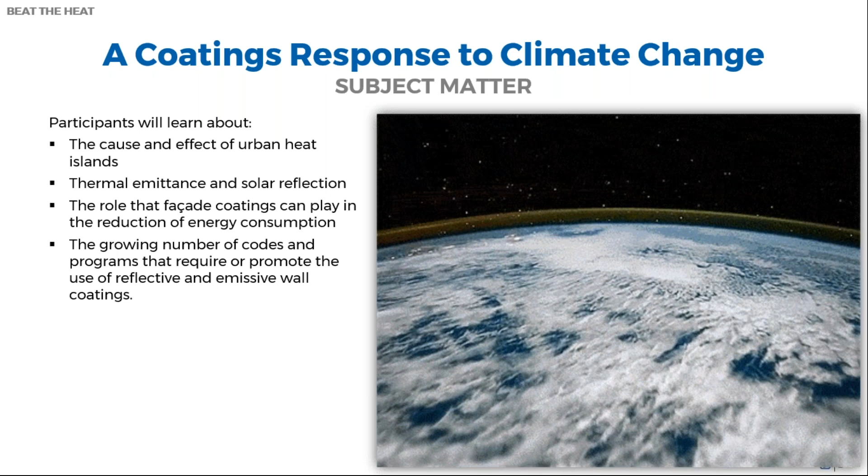You'll already have an awareness of the various cool roof code standards, some of the programs out there, but I'm going to introduce you today also to a relatively new initiative for cool walls. I apologize ahead of time if I get too heavily involved in the physics side of this discussion, but I don't want you to leave here today thinking that I've got some magic beans that I want you to buy from me. So I am going to spend a little bit of time on the physics.

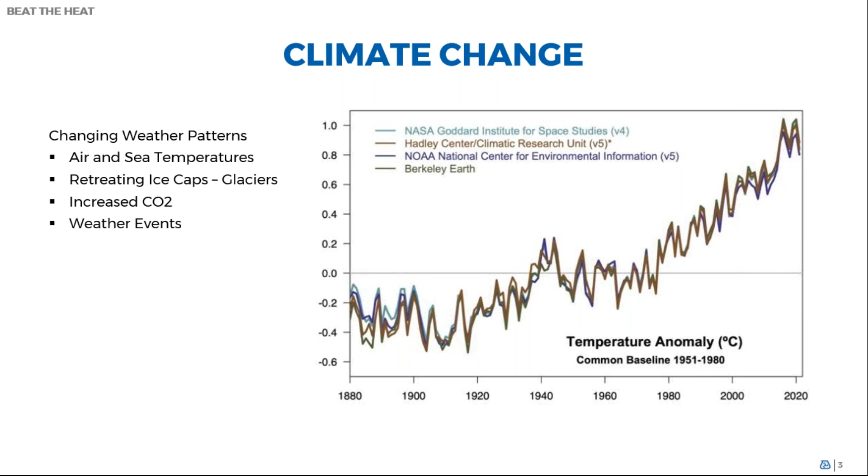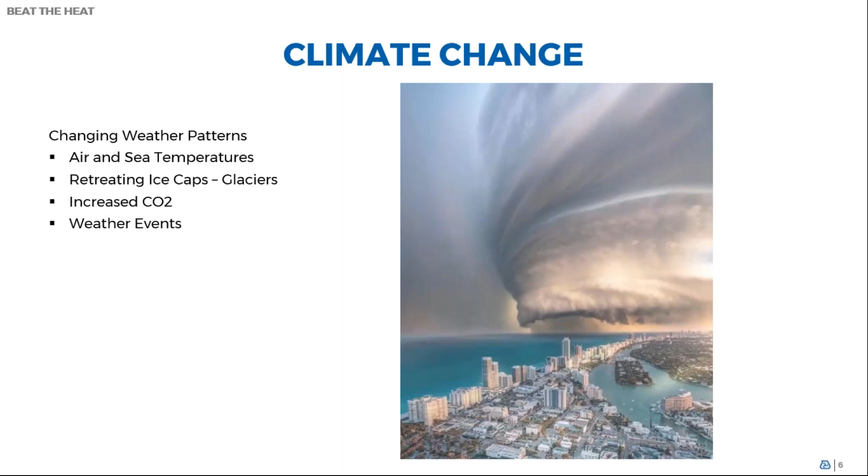Wherever we are in the climate change debate, I think it's undisputable that the global weather patterns are changing. Air and sea temperatures are rising. Ice caps and glaciers are retreating. CO2 concentrations have increased. And extreme weather events are becoming more frequent and more intense. These physical manifestations are quite obvious and very, very easily measurable.

At the same time, our global population topped 8 billion in late 2022. Although growth rates have slowed and will continue to slow in the developed world, it's obvious that the demand on finite and non-renewable resources of the planet is going to continue globally. Without significant intervention, continued amplification of these climate change events seems inevitable to me, and a solution is going to be the work of several generations, right across the globe. It took a long time to get here, and it's going to take a long time to put it right again.

But with the growing population and rising prosperity, particularly in the developing countries where this demand growth will be the greatest, doesn't necessarily affect us here in the States, does it? However, from a global standpoint, it's going to be a very significant and sustained draw on resources. Things aren't going to get better globally. Certainly here in the US they will, but developing countries are going to be contributing more to the problem than solving it. So moving forward, we'll have less to do with the problem, but we'll have a bigger part to play in the solution.

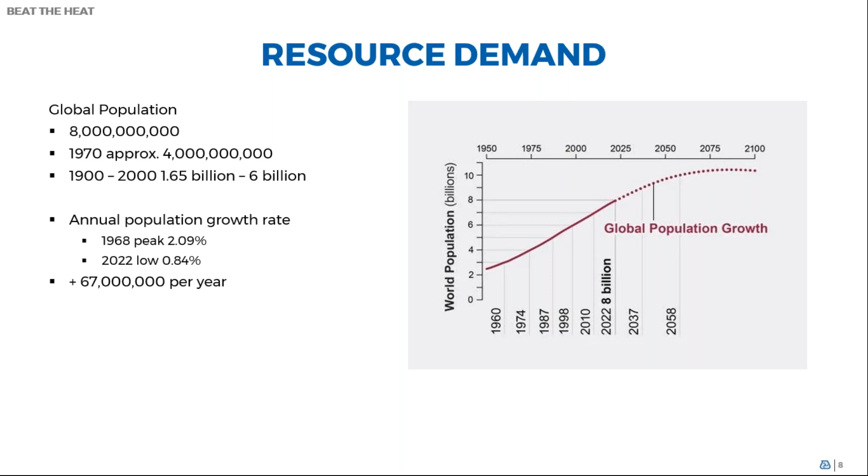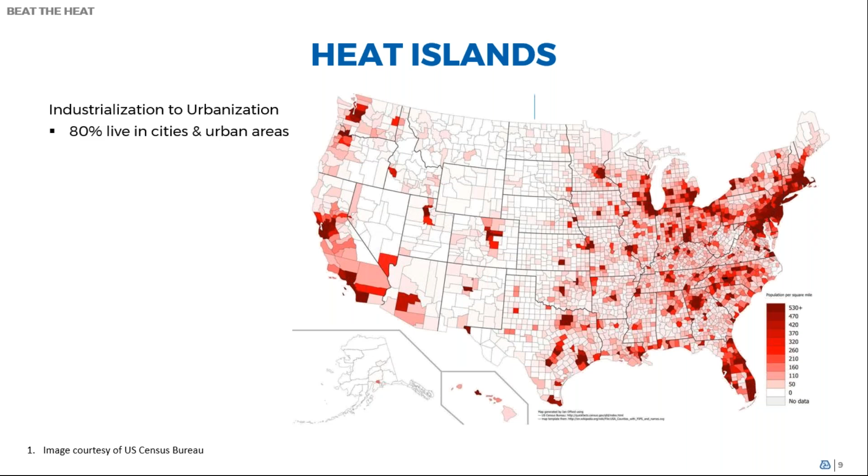The US was one of the first countries to industrialize, starting in the 1870s, and by the 1920s it made the switch from a predominantly rural population to an urban one, with urban centers initially developing around transportation hubs. It's estimated that 3% of the Earth's surface is occupied by urban centers, and while that doesn't sound like much, consider that only 10% of the Earth's surface is actually habitable. So there's a lot of space covered by cities and urban areas out there. Today, more than 80% of the US population lives in urban centers.

Urban areas are characterized by large expanses of sealed surfaces, dark impervious materials, roofs, walls, parking spaces, roads, and a notable lack of green space. Tall buildings form urban canyons that block air movement. Waste heat from vehicles and AC units also exacerbates the problem. Rainfall is channeled away in storm water, meaning there's less cooling by evaporation, and because of lack of vegetation, there's less transpiration as well. By contrast, in a rural setting there's less heat absorption to start with, and there's a natural cooling effect from groundwater evaporation and transpiration from vegetation.

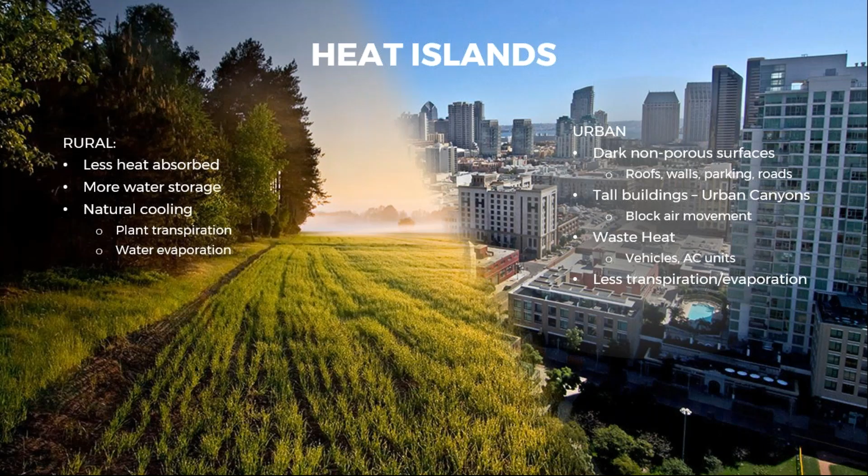In urban areas, our preferred construction materials are concrete and steel, which act like a heat sink, absorbing and holding energy throughout the day, only to start releasing it again after sundown. The EPA estimates that daytime temperatures in urban areas are between 1 and 7 degrees Fahrenheit higher than an adjacent rural area on the same day, and nighttime temperatures are 2 to 5 degrees hotter.

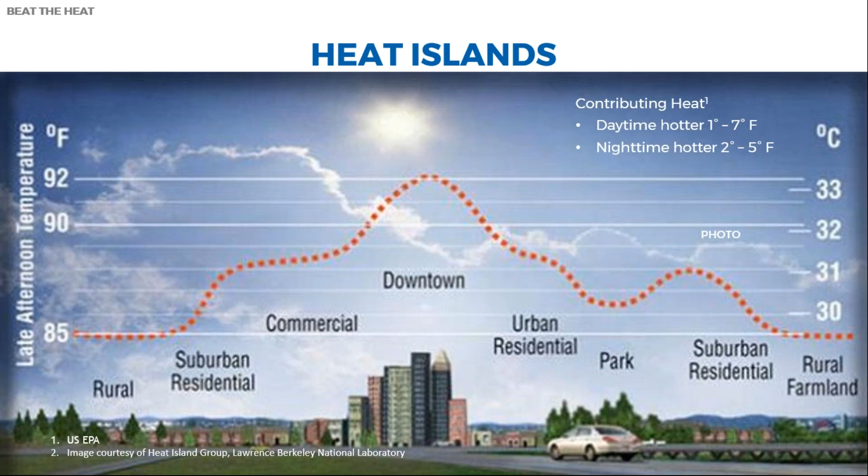Whilst everyone is affected to some degree, it disproportionately affects marginalized groups and inner city communities. And it's not a new phenomenon either. Scientists first noticed the heat island effect occurring in the early 19th century, but it's obviously gotten a lot worse as our climate changes, and as urban population, size, and density increase in mass.

Inhabitants of urban areas are obviously more vulnerable to these elevated temperatures. At the same time, there are also a number of indirect outflows from urban heat islands: increased demand on the electricity grid resulting in potential brownouts, reduction in air quality, the development of smog, and stress on infrastructure and social services as well.

We understand what the heat island is and recognize that with a changing climate, things won't get better without some intervention. It's a vicious cycle - as the climate gets more extreme, the more energy we expend to individually combat the effects. It won't even matter if we've managed to attain carbon-free electricity production by 2035 or net zero by 2050. As I made the point earlier, climate change is a slow process and we'll have little control over what's happening on the other side of the planet. Heat events and urban heat islands are going to be around for a while.

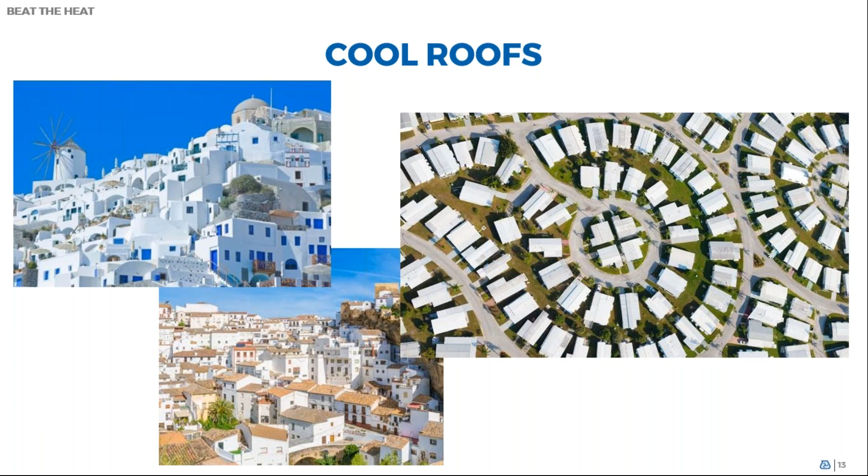So that's where we can look at some of our architectural materials to provide us with some immediate short-term relief. The concept of using white and light color finishes on exposed building surfaces to control heat is not new. In some areas of the world, it's been a way of life due to the lack of infrastructure or the availability and affordability of air conditioning. But it wasn't until the late 1990s in the US that we started to pay attention to the science behind the energy saving opportunities.

In 1998, a bit of a timeline here - the US Green Building Council launched the LEED program, which drew focus on the building supply chain: how products are made, their efficiency, and how they're brought to market. The Cool Roof Rating Council was also established in 1998 to develop fair, accurate, and credible methods for evaluating and labeling the radiative properties of roofing products - specifically solar reflectance and thermal emittance.

That was quickly followed by an update to ASHRAE 90.1 in 1999, which has long been the benchmark for commercial energy building codes in the US. Cool roofs quickly became the fastest growing sector of the building industry, and with California adopting Title 24 to their building energy efficiency standards in 2001, this movement really accelerated.

And today, this is the scope of the codes, ordinances, and standards that are in effect. In each case, there are specific solar reflectance and thermal emittance criteria, but at the cornerstone of each of these standards is the measurement standard proposed by the Cool Roof Rating Council, which has been adopted as the standardized test measure. These apply to all roofing materials, whether they're roll, sheet, or fluid applied, and you can be sure there are individual requirements and exclusions within each of the standards depending on where and what materials are being used.

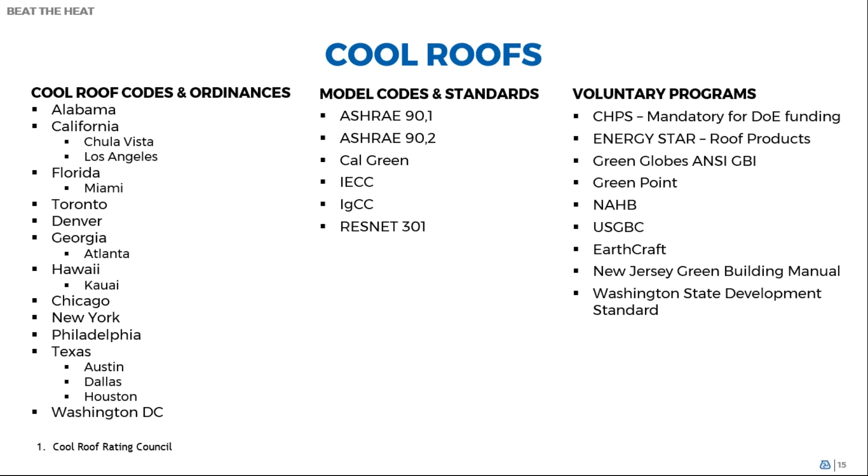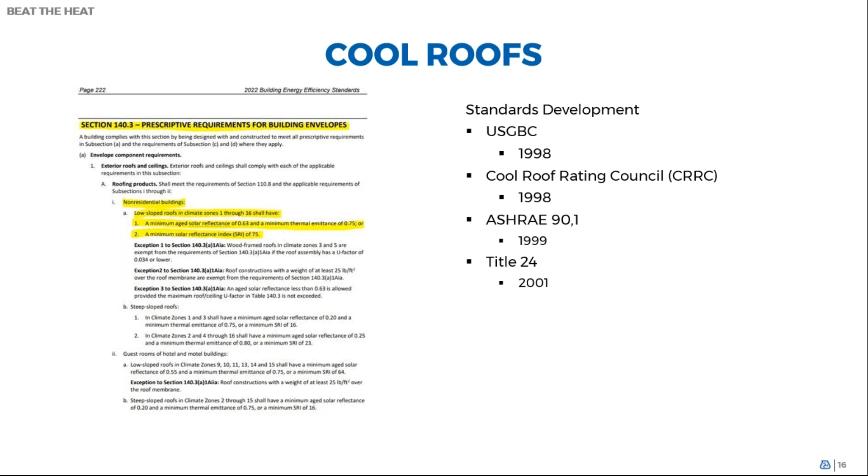The discussion of these is beyond the scope of this presentation, but to draw a quick example from the 2022 California Title 24, this is one of the prescribed requirements. There are individual requirements for occupancy type, low slope roofs, steep slope roofs, and potentially different requirements depending on which California climate zone you're in. Note that they're required to have a minimum aged solar reflectance and thermal emittance of these values.

I emphasize the word aged because when the roof is first constructed, everything is new, bright, and clean. But then on exposure and over time, there is weathering which degrades the surface and provides the potential for buildup of dirt, grime, organic material, etc. that will reduce the solar reflectance and thermal emittance values.

The standard testing prescribed by the Cool Roof Rating Council is an initial measurement performed by a laboratory. Samples are then put on a 3-year test fence, and after that time, they're measured again to give us the aged measurements. The manufacturer then updates their credentials, or if they don't meet that age minimum, they're removed from the accredited list. Obviously, that can be problematic for a manufacturer trying to bring products to market today, but doesn't qualify under the test specification for another 3 years.

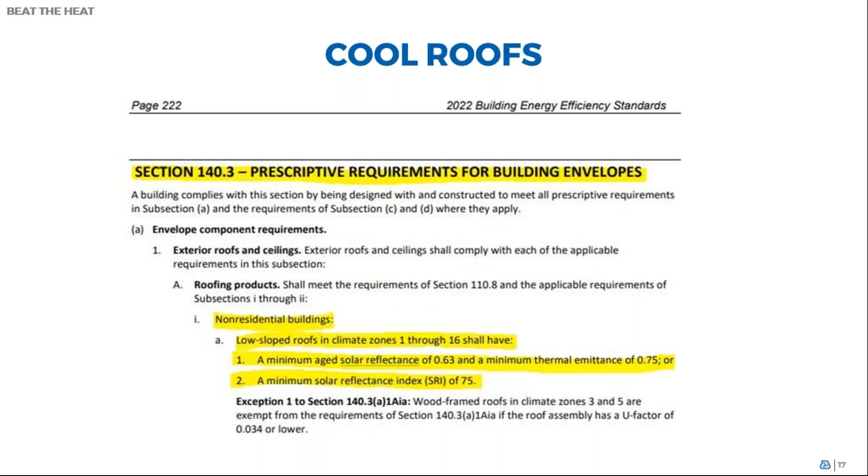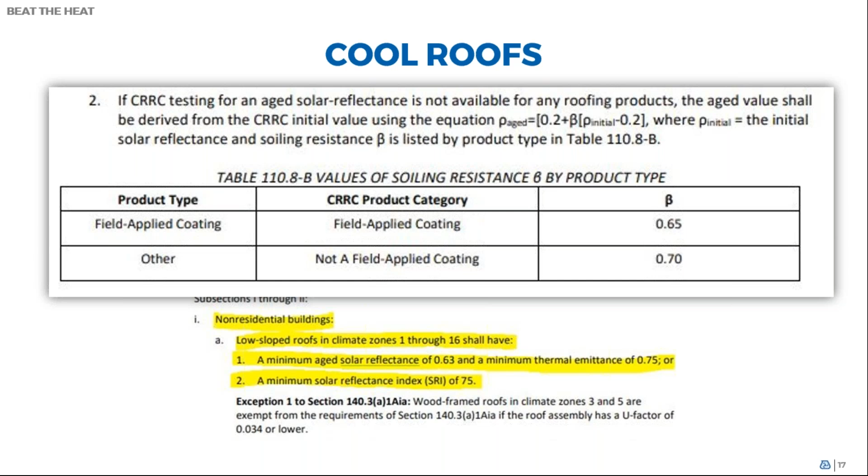Fortunately, Cool Roof Rating Council have developed an aging calculation for roofing materials to avoid such an issue, allowing roofing materials to enter the market with a provisional approval. And if my math's correct, we'd need an initial solar reflectance of about 0.9 to calculate an aged solar reflectance of 0.63 after 3 years. Thereby, it meets the Title 24 standard. And that's not a reach for most products, well, certainly white-colored roofing products.

So what are solar reflectance and thermal emittance? Solar reflectance is the measure of the amount of solar energy that's reflected by the surface, of the energy absorbed by the structure. Some of that will be transferred through to the interior space. The balance will be released again to the environment through emission of radiation. The efficiency of the material to release energy is thermal emittance. Both of these measures are on a scale of 0 to 1, or you can use a percentage if you like, 0 to 100%. The higher the number, the more efficient the material is.

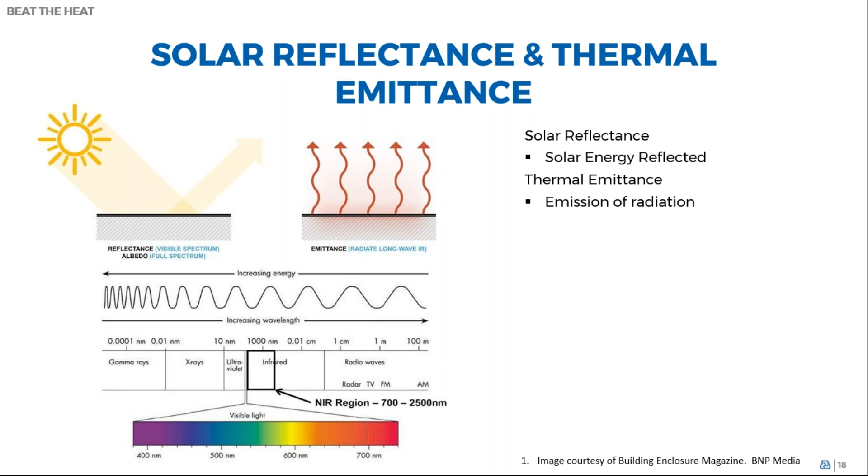So going back to Title 24 for a moment, we also see an acceptance criteria for products that have a solar reflectance index, an SRI of 75. So here's another variable that we're adding to the conversation. Once again, this is on a scale of 0 to 100, but it's a calculated measure, a complicated series of steps and factors that factors in both solar reflectance and thermal emittance to arrive at an index number.

So why is that important? Well, on an aged system, it's theoretically possible for a product to lose the solar reflectance over time, but it will maintain a high level of thermal emittance, and it could still qualify on the basis of the solar reflectance index. So I hope I haven't confused you with that, but there are many online calculators for this purpose, and using various combinations of thermal emittance and solar reflectance, you can see this relationship at work.

Solar reflectance can be easily improved by utilizing lighter colors that are more reflective. And it doesn't get better than a high contrast white, for example. Snow, in fact, freshly fallen snow actually does have the highest reflectance value of all.

Well, I should segue here with a comment, and hence our concern about the ice caps, right? Okay, I'll move on. And we can also influence this by using certain types of pigments in our coatings as well. And we'll come back to that shortly too.

And similarly, common red bricks have a better thermal emittance when they've not been fired or glazed. So it gives you a handle on some of what we're talking about in terms of building materials for facades. But for the most part, we associate heat with visible light.

In this case, visible light accounts for about 45% of the sun's radiation. As you see in the diagram, it's within a very narrow wavelength band, and it's these wavelengths that also give us our color association.

A further 54% of the sun's heat reaches us in the near IR wavelength bands. While it's invisible, it imparts a great deal of heat energy and is largely responsible for the heat island effect.

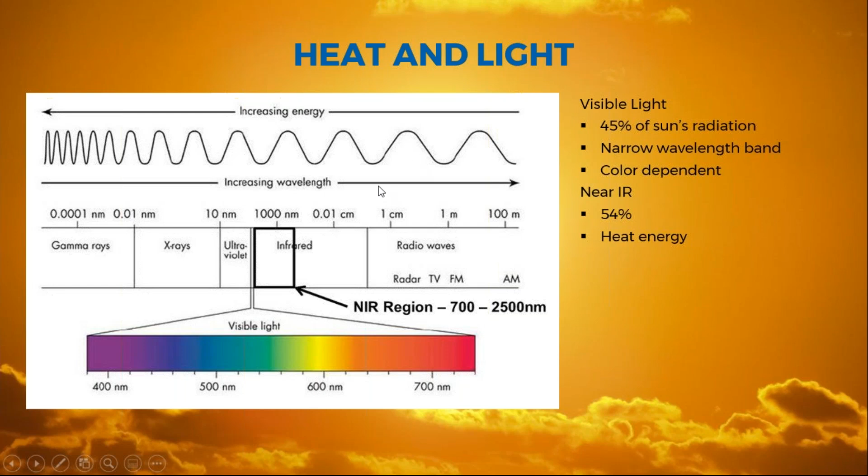So we can put that into context with this illustration where I'm measuring the surface temperature, not thermal emittance or solar reflectance, but just the surface temperature of each of these sample boards. They're the same type of cement board substrate with the same exposure to the sun on the same day, and the photos were taken within seconds of each other.

They've all received the exact same amount of near IR radiation, but the difference in temperature comes from the absorption of energy in the visible light spectrum. So while that's a very narrow wavelength band, they are shorter wavelengths and capable of generating almost as much heat energy as near IR.

So what we're talking about is the accumulation of near IR radiation plus the visible light radiation, depending on what color it is. You can see quite a temperature swing between the white and the black, and then just the generic cream color in the middle there.

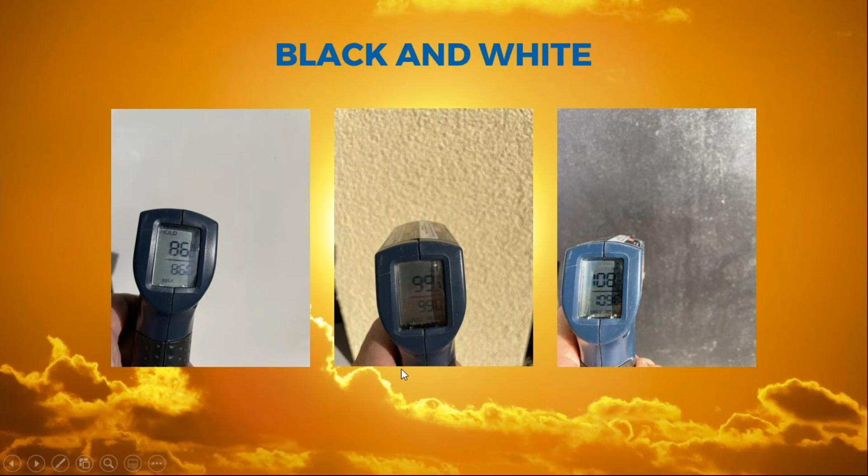And so turning our discussion to cool walls: exterior walls receive about half as much sunlight as roofs, but typically have about half as much insulation. It's much easier to insulate a flat attic space to the depth of 10 or 12 inches with insulation, but harder doing that in a vertical wall because of its dimension and construction materials.

There's limited space between the studs in wood frame construction, and access to wall cavities in brick and CMU construction is nearly impossible. A city is comprised of high-rise buildings that will have substantially more wall area than roof area. Therefore, dark walls can heat buildings and contribute to an urban heat island effect just as much as a dark roof.

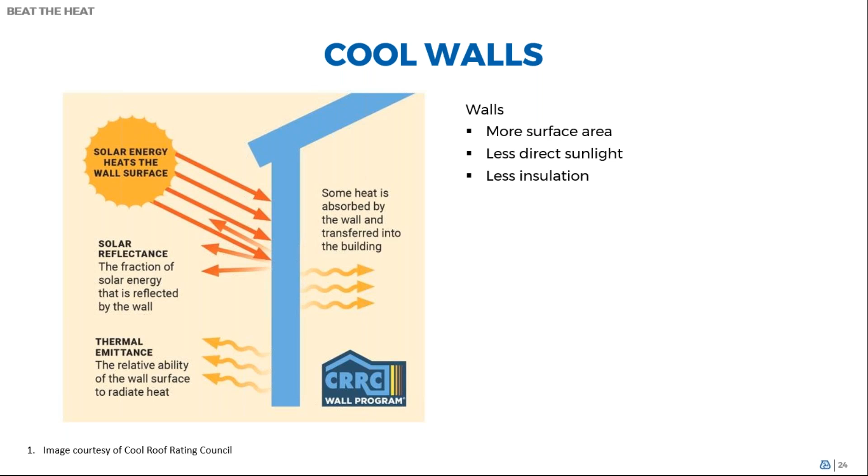So is the solution to the heat island effect that we all live in white houses with low slope white roofs? Well, ideally, yeah.

The titanium dioxide that colors our paints and coatings has a very high solar reflectance. It reflects all the visible light spectrum and a large portion of the near IR wavelengths as well. It'd also make our lives as paint manufacturers much easier if you all just buy white paint.

But of course, we know that won't happen because we all do enjoy our freedom of choice and personal expression.

So while the relative lightness and darkness of color is an indicator of solar reflectance, it's not an absolute. We can also incorporate some underutilized pigment technology to enhance certain color ranges to improve solar reflectance, through the selection of special chemical compounds like mixed metal oxides or titanium dioxide, it's possible to achieve a much higher total solar reflectance, especially in the near IR spectrum.

The solar reflectance of light and medium tone paints, for example, can be greatly improved with the addition of IR reflective pigment, hence the term cool colors.

The improvement of solar reflectance is even greater when we start phasing towards the darker shades, including black. You'd be surprised how many paint colors, even in the pastel and medium shades that we've got on our houses, incorporate a little bit of black. And that's enough to really shift the scale in terms of solar reflectance.

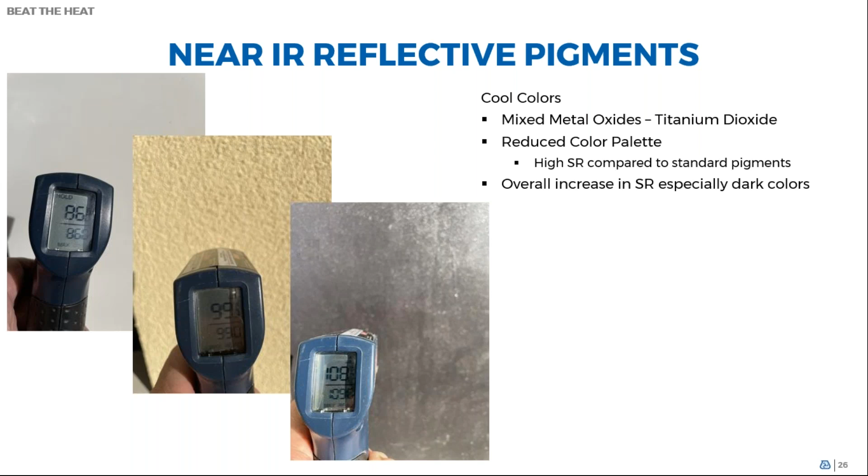But going back to these images, if we were to have used the appropriate near IR reflective pigments in the beige and the black finishes, we would have lowered much of the temperature imparted by these samples from near IR radiation. The visible wavelengths would still have generated some heat, but the thermometer reading would be significantly lower.

And then using a FLIR camera, this image demonstrates just that, and the benefits of painting a facade with a cool wall coating. The left side of the building is painted with a regular pigmented house paint. The right side has been painted in the exact same color, except it's been pigmented using IR reflective pigments.

So then viewed through a forward-looking infrared camera, we see the resultant infrared temperature of the surface, and you can see the effect the white door has, for example, but also the cooler wall that's been coated with the near IR pigment product versus the regular coating. I'm also interested in this image because you can see the thermal transfer of the studs as well, at various temperatures.

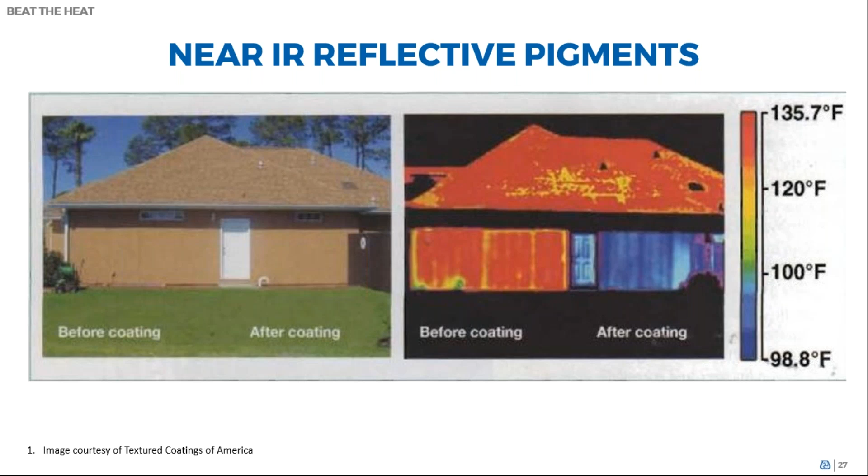So anyway, an interesting example of what we can actually achieve.

So the IR reflective pigments color space is not as complete as other paint tint systems, but with a very small amount of compromise, it would be possible to get a high performance cool wall color that generates immediate savings on your utility bill, and of course, do something good for the urban heat island effect.

But I should point out that these are not commonly available and will not be available in your favorite hardware or paint store. The technology is still very selectively utilized in the paint industry, but that's not to say it's not being used in other areas of roofing and siding products.

About 10 years ago, I was actually involved in developing and launching a cool wall coatings line at another employer. At that time, there was only one other manufacturer using this technology or trying to launch it as well. Unfortunately, the program appeared to be ahead of its time.

Distribution partners saw little need, and there was not the government or utility company incentives that were associated with cool roofs. Neither was there the support from lobby groups like USGBC or the Cool Roof Rating Council. So yeah, sadly that folded and took with it some inventory, but never mind.

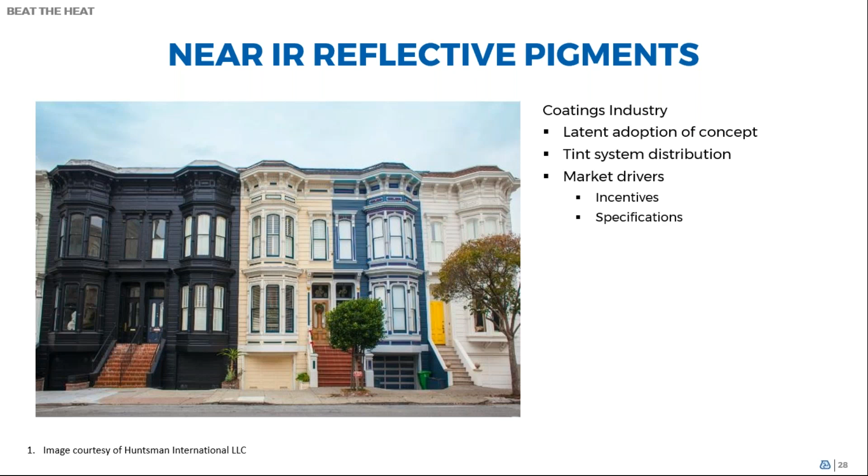What goes around comes around.

It was also not like we didn't have sufficient data either. Both Lawrence Berkeley National Laboratory and Oak Ridge National Laboratory host what they call a heat island group, a bunch of PhD scientists. In 2005, they performed a joint study with the Department of Energy and also Oak Ridge, setting up residential test sites around the country - one in Phoenix, one in Jacksonville, Florida, and one right there at Oak Ridge in Tennessee. Accordingly, they were able to develop a cooling model.

These were all for testing an IR reflective cool wall coating. They were able to develop a cooling model by construction type and location and calculate annual cooling energy savings of between 4 and 22% on your energy utility bill.

Savings were found in all climates having in excess of 1,500 cooling degree days using a 65-degree baseline. The higher percentage of savings were actually for CMU walls, which typically have a lower R value. So hello, I live right here in Florida in a building constructed of CMU, and pay quite a lot on my electricity bill.

Once again, the product must fall within a defined criteria specified by the program owner or the local body. So this obviously doesn't compare to the list we have for cool roofs, but they took 20 some years to get to that level. It's off to a good start here with Hawaii Building Code providing an insulation concession if the wall surfaces have a solar reflectance of 0.63.

That's pretty good considering the cost of construction, and certainly the comparative cost of a coat of an IR reflective coating or a cool wall coating compared to additional insulation that you have to install in the walls.

Actually, 90.1 has a cool wall requirement for climate zone 0, but the latest version will offer an energy credit for climate zones 1 and above. Cal Green, that's a stretch code, only becoming mandatory if a local jurisdiction adopts it.

But the cool wall movement was really given a boost by the US Green Building Council with a pilot credit in LEED 4.1. The heat island mitigation credit is available if at least 75% of the building's exterior is covered with a cool wall material with initial solar reflectance of 0.6 and thermal emittance of 0.75.

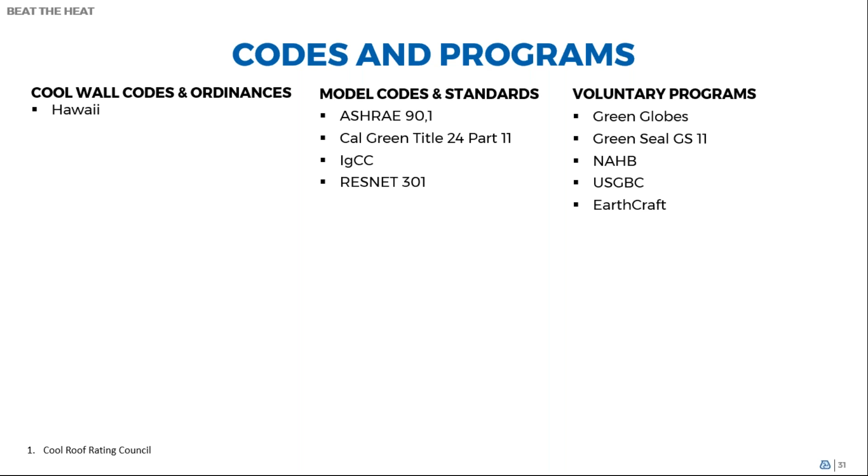Numbers are, as I said earlier, fairly easily achieved with light-colored coatings. So it is a pilot credit, but the hope is that it's going to roll on over into the coming years as well, and help us drive this cool wall program.

So hopefully we'll see some rapid growth with the cool wall rating program as a result of the collaboration by a large number of coatings and facade material manufacturers, backed by the proven integrity of the Cool Roof Rating Council.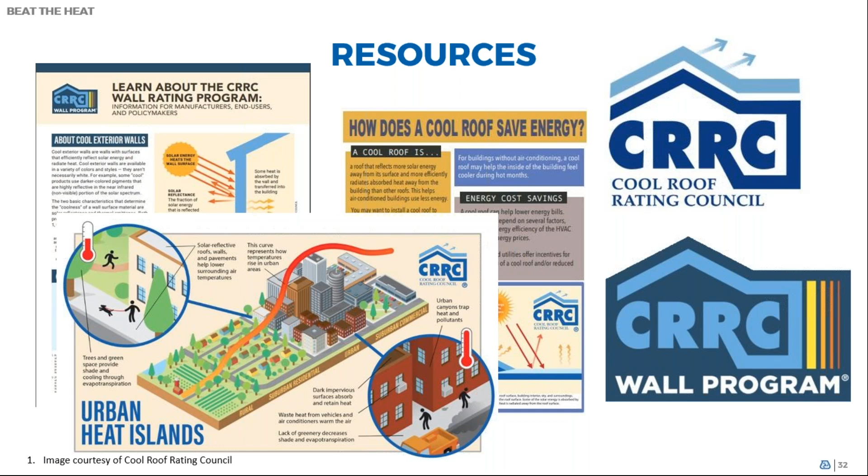You know, it's tough to get... sorry. Okay.

Just in summary, I don't have an estimate for the effect of cool walls or cool roofs on an urban heat island, but the science all points to say it should help. Other studies from the folks at Berkeley say that if 85% of all air conditioning buildings in the US have white roofs.

Associated energy costs for buildings would be reduced by $735 million annually. By increasing the solar reflectance by just 1% across the 3% of the planet occupied by urban areas, we would reduce CO2 emissions by 44 gigatons. I have no idea what that means, but it's equivalent to the CO2 emitted by 300 million vehicles, which is about as many vehicles as we've got on the road here in the United States.

Remember though, it's a one-time deal. It doesn't actually recur every year thereafter. It's a one-time savings on CO2 emissions, but it would actually set the path to correcting our CO2 emissions.

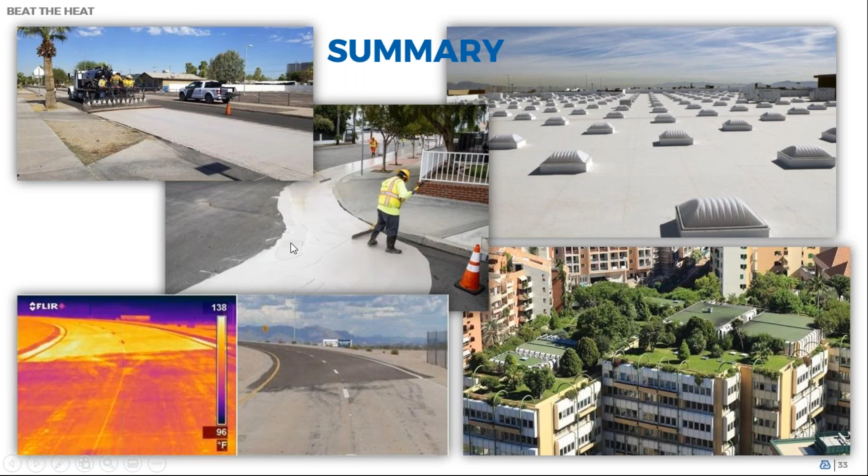So with that, I will finish, and I really do appreciate your attendance today. I think we do have a little bit of time available for Q&A, if that's okay, Jen.

Jen? Okay. Hi, can you hear me now? I can hear you now. Hi. Oh boy, I'm talking away. Sorry, I thought I'd been talking to myself for 30 minutes. Nope, it was unmuted, but it was muted at the source here. Sorry about that, I apologize. No worries, Rankin, a very great presentation as always. And yes, we do have a few questions. So let's get started, shall we?

Sure. The first question: are cool wall coatings just as good as regular paints? And do they cost more?

Oh excellent, I was hoping it was going to be a physics question. I was worried it was going to be something like that, but no, I love it. This is right in my wheelhouse.

No, yeah, they are just as good. They use the same ingredients as a regular paint or coating. The only difference is the pigmentation used to produce the final color you've chosen for your property. But in some ways they could also be considered superior, because they reduce the associated heat buildup in the wall, and thereby reduce the thermal cycling of expansion and contraction in the coating and the substrate. So the less the wall moves, the less likely it is to crack, and the less likely you are to have moisture mitigation issues or leaks.